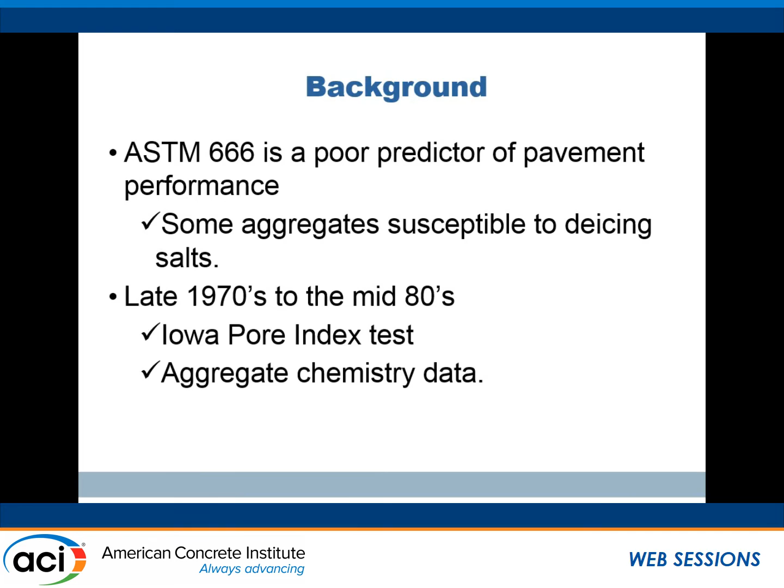The history is, again, early 50s, 60s, 70s, started to work out there was a problem. The freeze-thaw approach kind of didn't work. So a couple of guys in the DOT got together and started to look at what are the common features of the systems that are working and the ones that are not working. And it seemed to them to come out to be a combination of the pore size issue and some chemical effects.

One of the reasons this is kind of entertaining is that Iowa is not a simple set of geology. And again, I'm an engineer, not a geologist, so I'll talk about the slide very quickly and move on. But there's lots of pretty colors, and they're all different.

You know, we're dealing not only with pure limestones. We've got mixtures, fairly high dolomitic materials, and a whole range of stuff in between. The short answer is the good stuff is up in this corner, and the bad stuff is down in this corner.

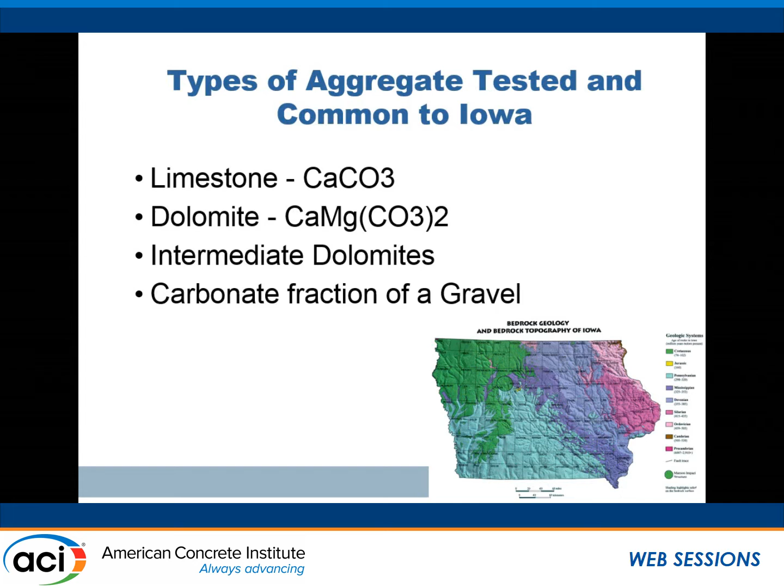And again, we're also getting some materials coming in from the Minnesota side, which are glacial mixtures. So you're getting a pile of stuff that's rounded, it's been beaten up by the glacier, but it isn't a pure material. It's got all sorts of jumbled stuff in it, and that's part of the work that's still ongoing.

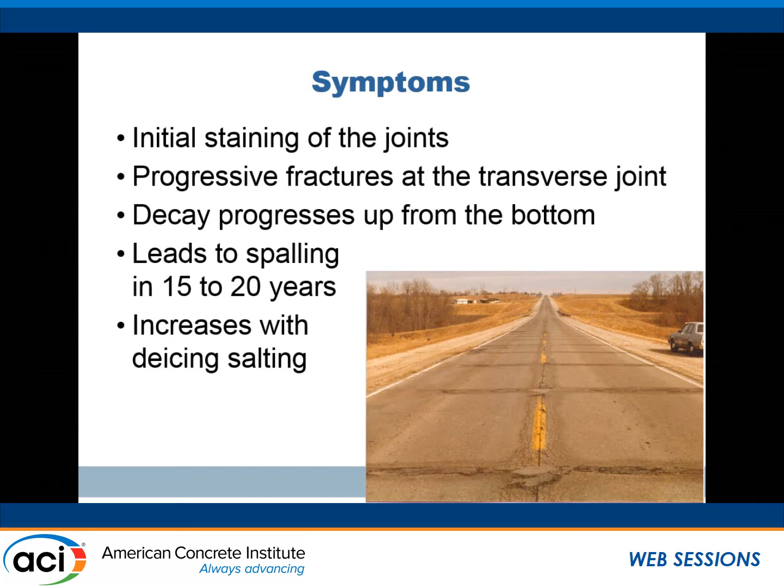So again, we've already heard a lot of information about what it typically looks like and how quickly it starts to fall apart. The same sort of numbers that Tom and Randy have talked about: in 15 to 20 years, it starts off with staining, then cracking develops, and it's not very pretty. This is one that hasn't been talked about: de-icing salts seem to make it a little bit worse. Again, images that are not very different.

Somebody was asking a question: how do we tell if it's an aggregate or a paste-based issue? To my mind, it's pretty simple. On the outside, Tom already referred to it, or maybe it was Randy, that the cracking format is slightly different. If it's an aggregate-based issue, it tends to spread further and further away from the joint. If it's a paste issue, it tends to move a little bit more slowly.

But really, the fundamental test is to cut it in half and put it under a microscope. If the cracks are in the aggregate, it's an aggregate problem. If the cracks are in the paste, it's a paste problem. And if you want to learn about that one, you've just missed a really good session two doors down.

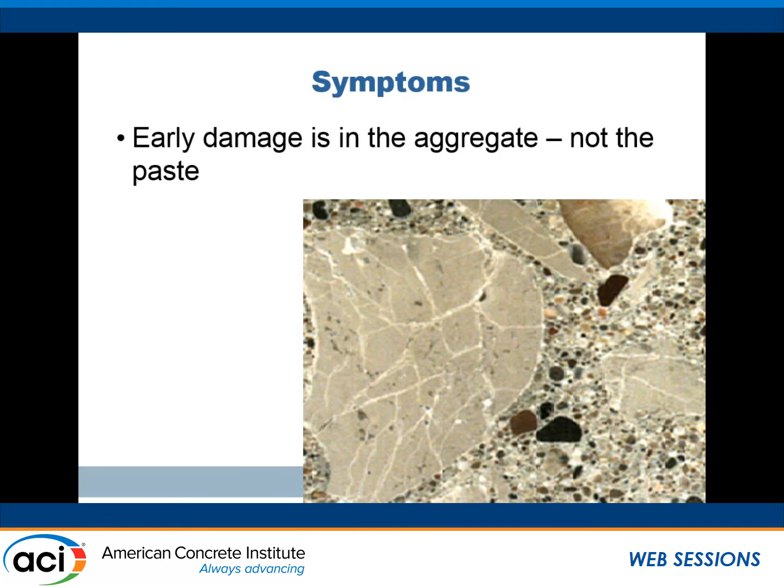The topic of the work I've been involved in is looking at what's causing the paste to fall apart. Jason and Larry and all the smart scientists are talking about that in another session, so we'll focus a little here on the aggregate side of the game.

The DOT adopted a number of different classes, and this is basically based on experience: how long did things last before they started to go to hell? They came up with these different classes. Basically, the bigger the number, the longer we would hope the system is going to last.

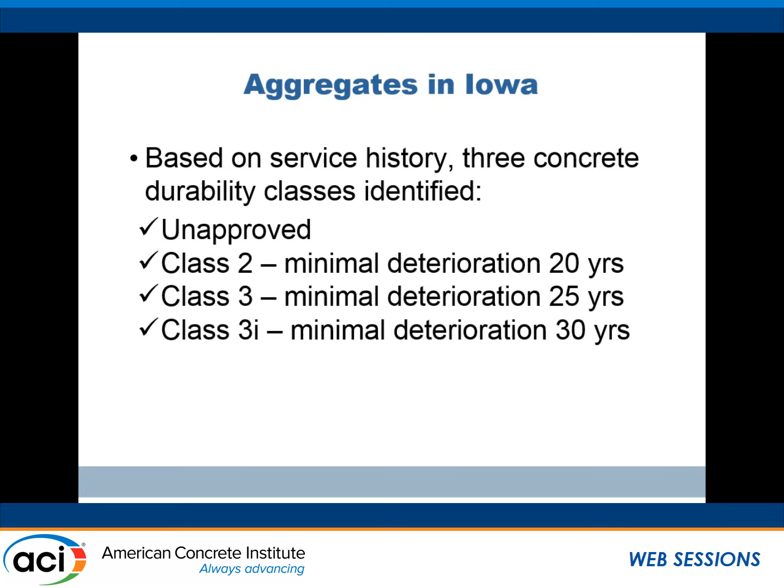Then they started working on what are the test methods that tie together with this performance. One of the ones hinted at in an earlier presentation is that Wendell Dubberke came up with this concept that it is the range of the pore sizes in the aggregate that is critical.

We can explain that because if you think about your bath sponge, the holes in that sponge are pretty big. You can get the water into the sponge, you can get the water out of your sponge. It's all pretty easy. You pick a sponge out of your bath and it runs pretty quickly. Don't have to leave it long, and it's reasonably dry. Big pores, water comes in, water goes out, who cares?

Very small pores, the water doesn't get in at all. No problem, because if we haven't got critical saturation, we don't have an issue when freezing occurs. However, there is this range which is just wrong, in the order of about 0.04 to 0.2 micron. This range is just wrong because capillary suction is high.

It loves to pull the water in, but the thermodynamics is such that it's really difficult to get the water to evaporate out. That capillary surface holds the water in. It's energetically preferable for the water to stay there, so the system doesn't dry out very readily.

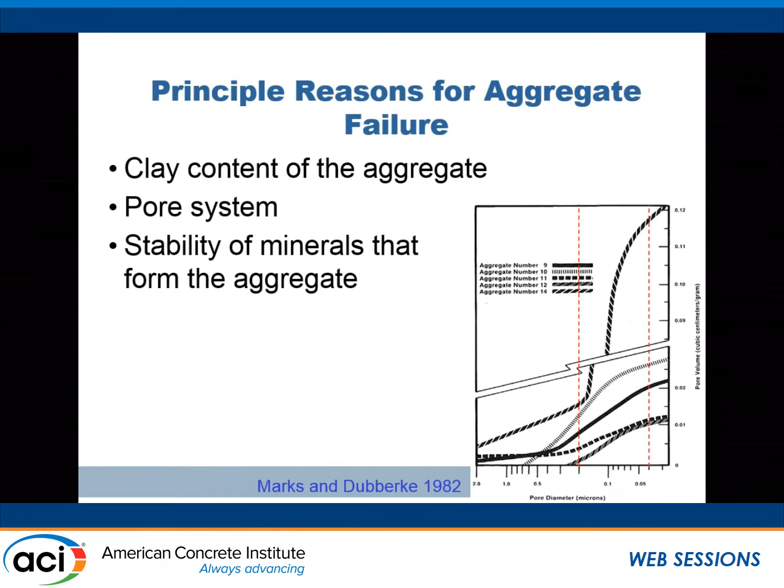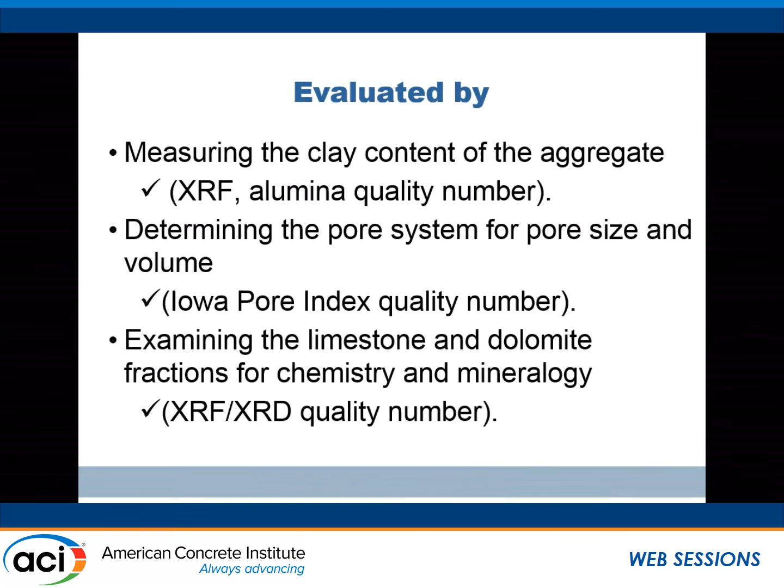So the three parameters that the DOT uses - it's not just the size. They look at the clay content of the aggregate, they look at the pore system, the pore size, and they also look at the limestone dolomite balance - so how much magnesium do you have in the system.

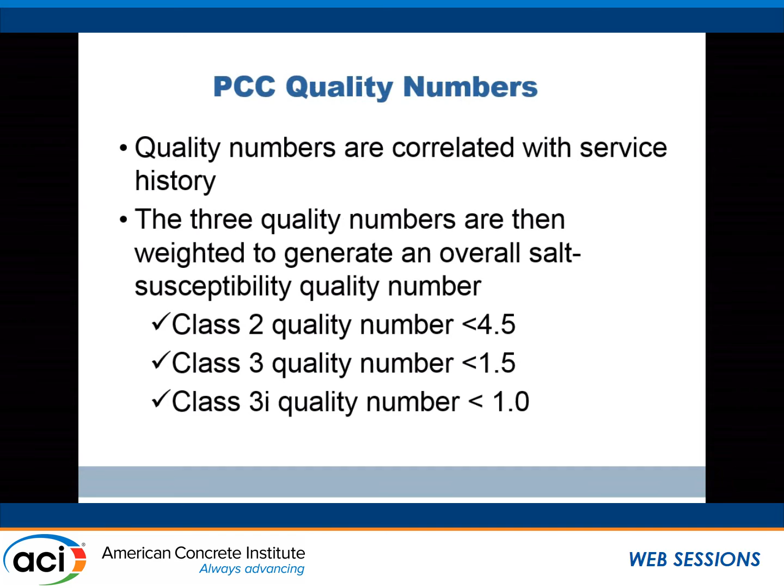They come up with what they call quality numbers, and they do a weighted system on which quality number matters the most depending on where it sits on that limestone dolomite scale. I'll get to that a little bit later.

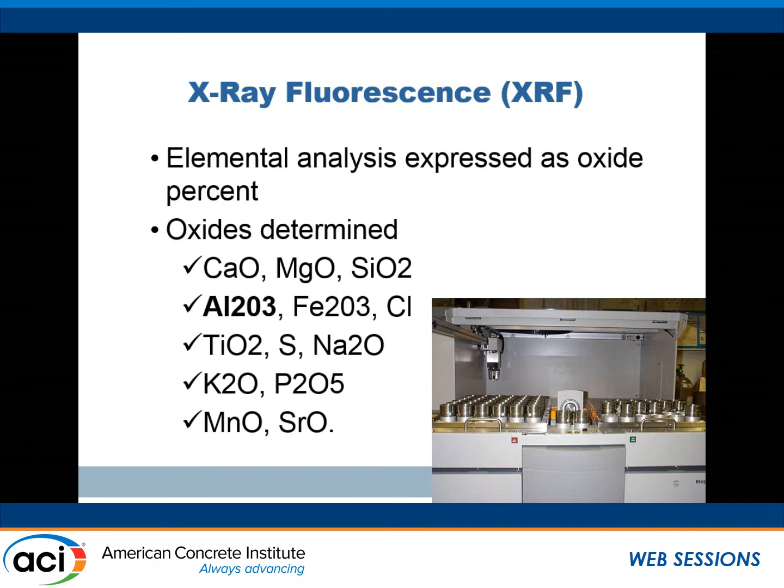So the first parameter that they're really excited about: alumina. Why? Because all clays contain alumina, so you can run an XRF and pick up what is the alumina content of the material. I think that's the basis of what you were talking about, Heather, is if you're going to characterize an aggregate at its point of delivery, that ties in quite nicely with what we're doing here. So again, pretty simple stuff.

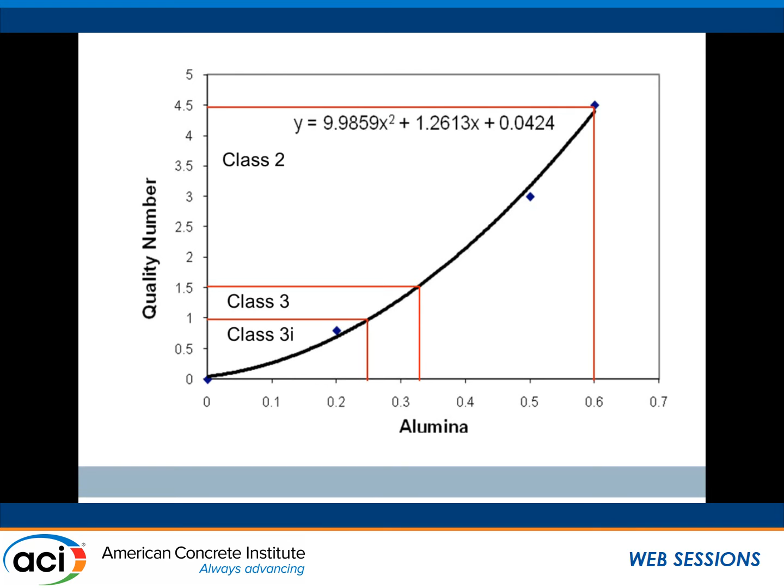They've got a fairly good correlation between clay content and alumina content. They've come up with historical data: if you have alumina between 0.3 and 0.6, it's not so good, and if you've got less than 0.25, it's really good. So they've classified the aggregates based on the alumina content.

Then there's the Iowa Pore Index test, which Heather alluded to earlier. Interesting approach — basically you take a sample of the aggregate and squeeze a bunch of water into it. You measure how much water goes in over 2 minutes or 1 minute, and how much goes in over 15 minutes. You get two numbers, called the primary and the secondary. The critical one is how much water goes in over a fairly long period of time at fairly high pressure.

There aren't too many of these devices floating around, and it hasn't found a lot of acceptance by other DOTs, including Kansas — I think you guys play with it but don't really use it. The Iowans love it, though. They think it works. Still got to sell it to everybody else on the planet.

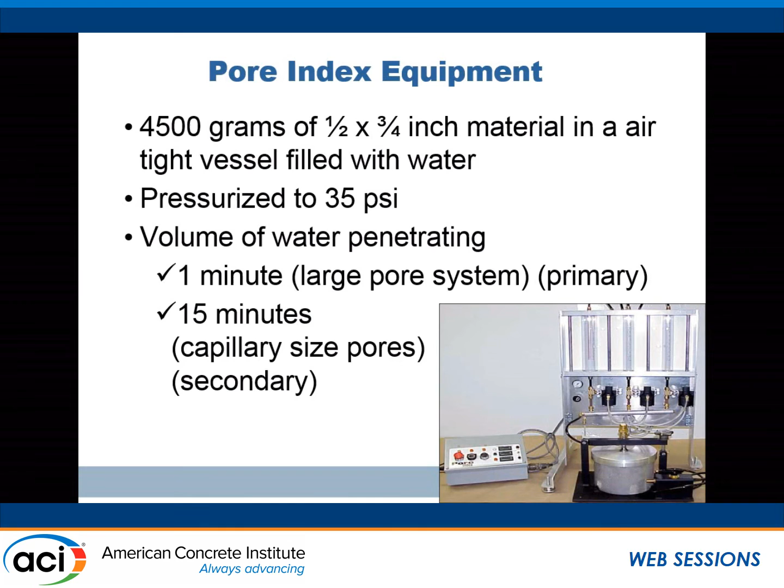There aren't too many of these toys around. The DOT has one, and I borrow it occasionally. But what it's doing is using how easy it is to push water into the concrete to get a handle on that pore size distribution. They've come up with quality numbers based on the different results coming out of the test, so we're qualifying it as good, bad, and not so good.

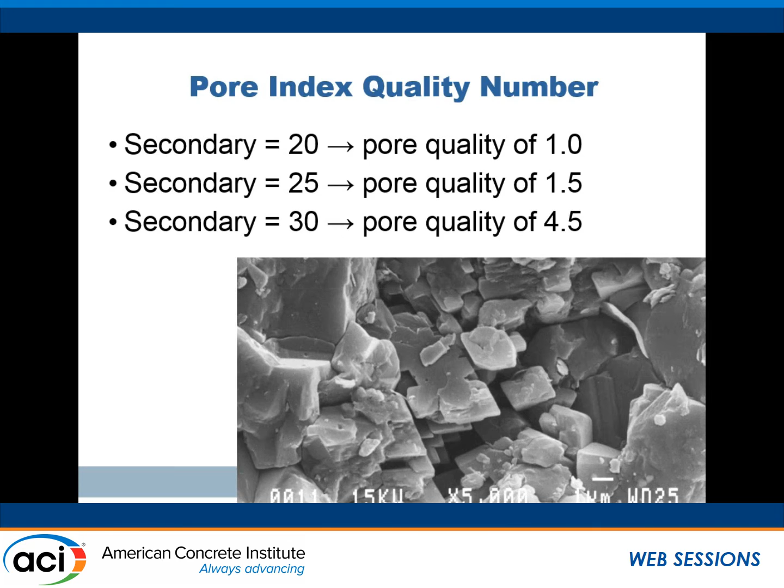Then they use X-ray diffraction. This is the gauge they use to quantify where the material sits on the limestone-dolomite family.

For those who don't know — I'm a dumb engineer, I had to be taught this pretty carefully — there's pure limestone, which is calcium carbonate, and then there's dolomite, which is calcium magnesium carbonate. The amount of magnesium in that system varies between none and a lot. I don't know, geologists, help me — how much can we get in there?

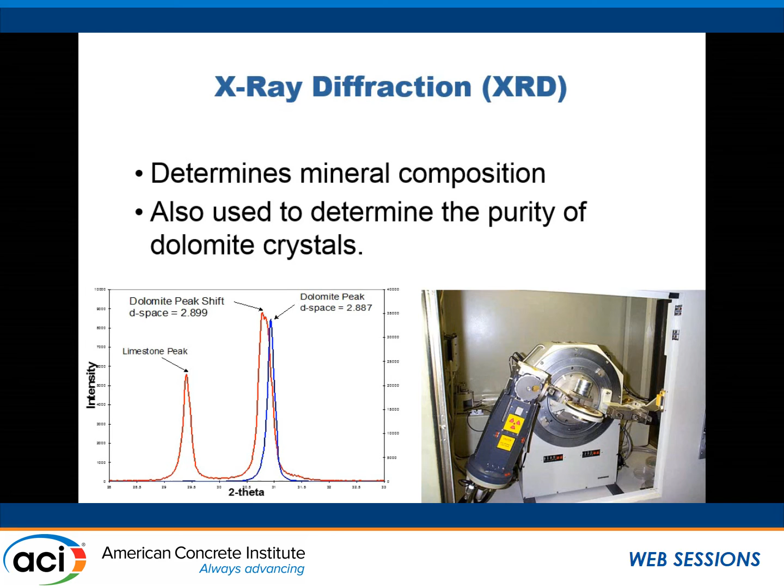No one's answering, okay. So it's not like there's a distinct this-is-dolomite and this-is-limestone — it's normally a jumble of the two compounds. We're talking about a variable system we're trying to get a handle on. If you run XRD, you get a limestone peak and a dolomite peak, and under certain circumstances you can get a bit of a shift. It's that shift we're interested in — the bigger the shift, the worse off the material is going to be.

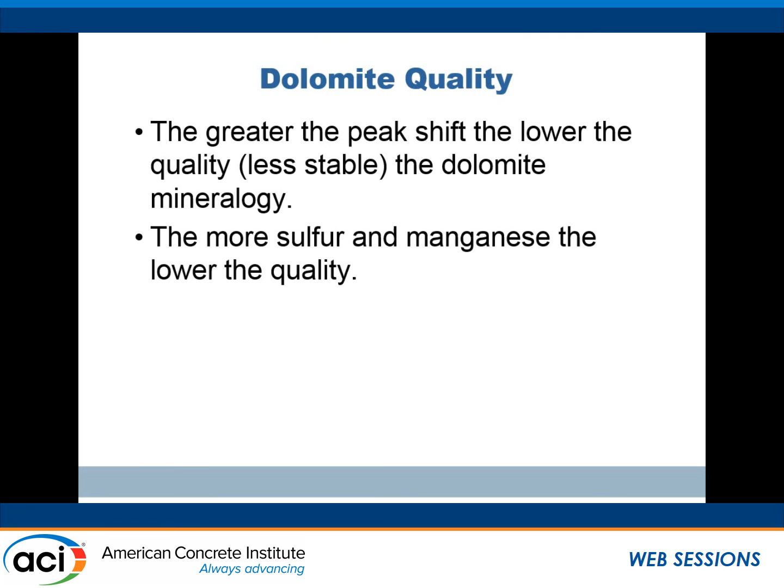Tied to that are other chemicals that may be in the system, sulfur, manganese — the more there is, the worse. These are the compounds that react with de-icing salts, so the sensitivity to mag chloride, calcium chloride, even sodium chloride is tied to these other contaminants in the system. Rock is not a pure material — there's other stuff in it too.

Then there's the issue — okay, we've now got these three quality numbers: the XRF, the pore index, and the XRD-based numbers. Which one's most important? The answer is, it all depends.

If the material is tied to the limestone end, the XRD side isn't that critical, so it's a pretty equal balance between the pore index and clay content as contributors to the risk of deterioration. If you're at the high end of the dolomite scale, the XRD is important but balanced out with the other two parameters. At that intermediate dolomite level, around 10% magnesium, the XRD is probably the most critical parameter in the system. So it's a graduated scale depending on the system you're dealing with.

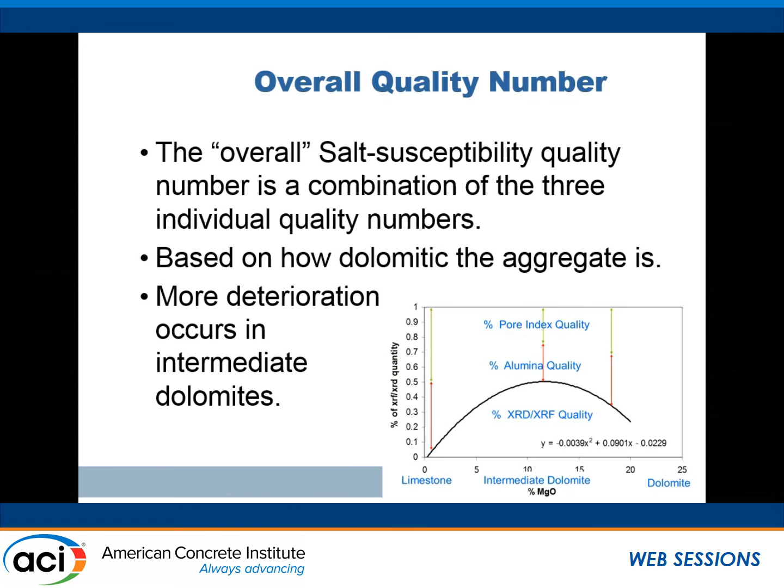So what they do is go to the quarry and core it in advance, then classify the different ledges. Here we've got various grades of what looks like a class 2 — that's a 20-year system. Then it becomes a matter of certifying whether the material in this bed is the same as what was sampled and approved, or at least classified, in the past.

The DOT has an ongoing process of ledge inspection and ledge pre-qualification, and that's how they feel they've got a pretty good handle on it — they pull the cores, run the suite of tests, and identify: this is good stuff, go mine here.

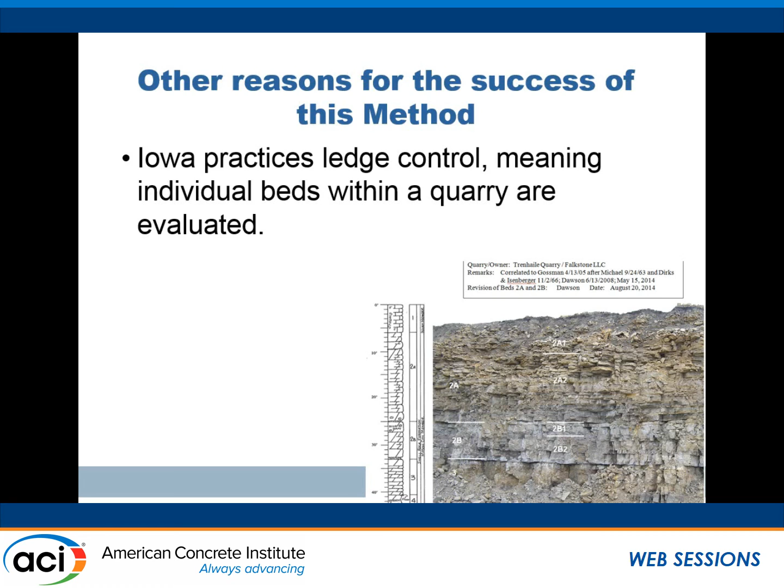And that's how we have a handle on it. So the DOT has this pretty convincing story. They do a bunch of tests, they pre-qualify the quarry, and we think we've got a pretty good story as to what is reliable and what is not.

It is convincing that the DOT has very little distress in their system of pavements placed since they instituted this program. Likewise, many of the cities and counties that follow the DOT processes seem to be in pretty good shape. In fact it's proving interesting. I wanted to get out there and get photographs of failing, cracking pavements, and there weren't so many, mainly because all of the bad ones have been covered up or replaced already. There's nothing relatively new that is showing a lot of distress.

The exception is privately owned facilities, the sort of place Tom was talking about. Gas stations are the worst. They are horrible, and that's because they're buying the cheapest stuff and it's not getting inspected.

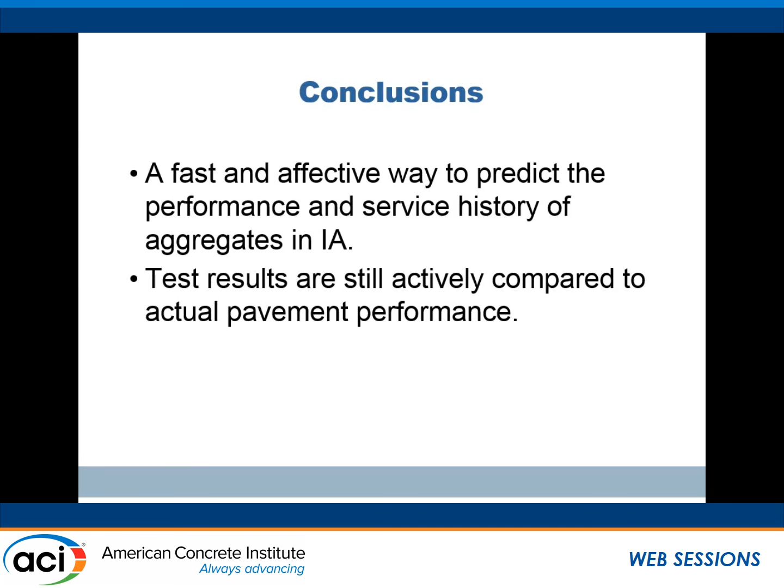All right, I did want to pick up one or two other points. The idea of the small aggregate, it's what we wrote about for years. The IMCP manual, we said 3/4 inch, 1/2 inch, go smaller. I'm beginning to think that all that did was buy us time.

I recently went on a site of a county street. The county engineer was pretty grumpy because his whole system was falling apart. Turns out the whole county paved all of their system in a space of 3 to 5 years in 1970. They followed the rules, said 1/2 inch to 3/4 inch coarse aggregate maximum size. They are in the southwestern corner of the state, which has problematic aggregates.

It worked. They got 40 years out of that pavement. But now it's starting to go, and the cores look just like the one that Tom just passed around - horizontal cracks near the surface. The water has got to it, it's been saturated, frozen, over 40 years. Being small, it's taken a long time, but it is still starting to fail.

So going small is not a bad idea, but it's not the sole answer. It buys us time - that's where I'm coming to right at the moment. So where do we go next? I'm starting to fool around with another test, you know, the Iowa Pore Index test. You need a fancy machine, you need lots of water, you need smart people to operate it.

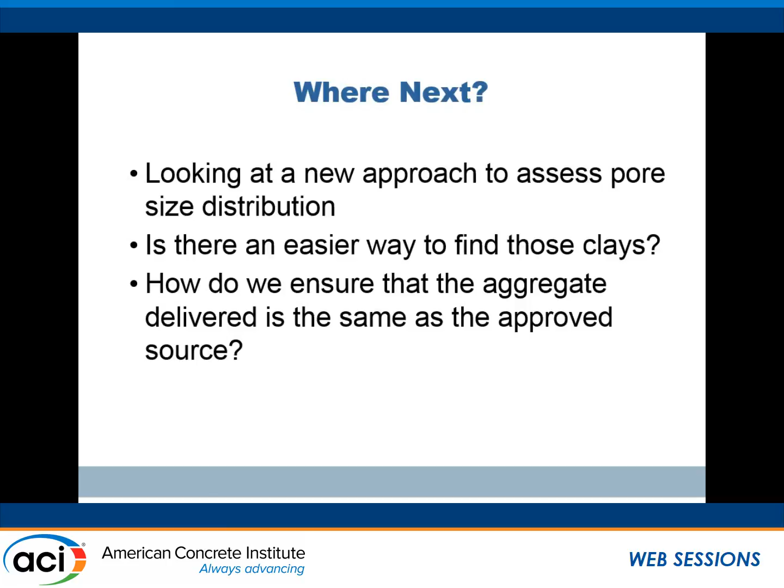I've heard this from other states. Michigan have been talking to me and saying, yeah, we do our quarry pre-qualification, that all works really nicely. But do I know that the stuff that's been delivered came from this ledge, or did it come from somewhere else? We need those sort of tools. So there is still some space for some fundamental research.